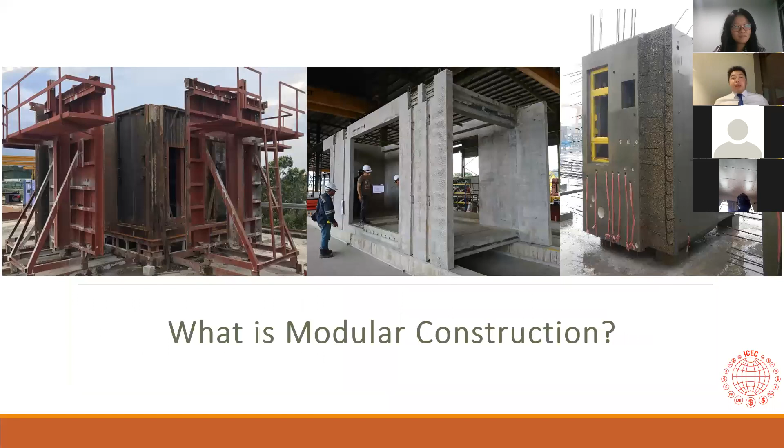Okay, so actually just for a few seconds to remind you all about our outlook, which this is covered. Okay, so what is modular construction? Modular construction, we have two terms here. One is MIC and one is PPVC. MIC stands for Modular Integrated Construction, while PPVC stands for Prefabricated, Prefinished Volumetric Construction. Both MIC and PPVC are the same in context, which is one of the innovative construction methods now, adopting the concept of factory assembly followed by on-site installation.

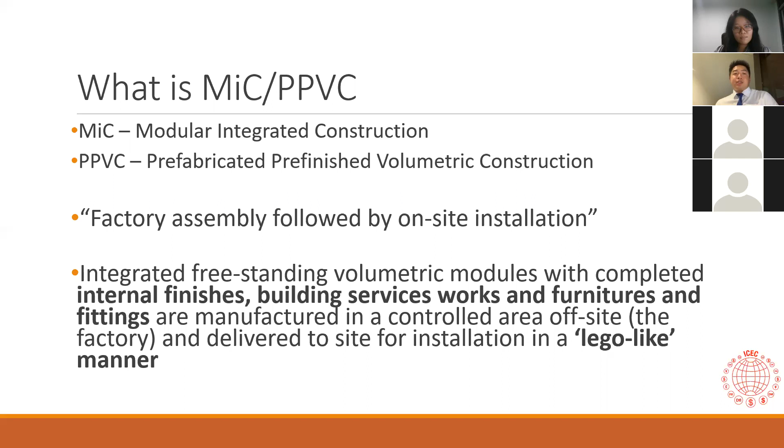Integrated freestanding volumetric modules with completed internal finishes, building services works, and furniture and fittings are manufactured in a controlled area off site, which is the factory, and delivered to site for installation in a Lego-like manner. MIC also claims to enhance product quality, at the same time improving construction productivity and safety. And MIC has been implemented across the world; many countries have already implemented MIC or PPVC for construction of housing, hostels, and other facilities, which seems to be successful in terms of productivity and cost.

On the other hand, prefabricated components only comprise small parts of a building. Structural parts other than prefabricated components need to be built using conventional in-situ construction methods. A substantial amount of formwork, steel fixing, concrete works, etc. are involved. Interior decoration and laying of pipes, etc. could only be carried out thereafter. Common prefabricated components include prefabricated facade, prefabricated slab, prefabricated wall, prefabricated staircase, semi-prefabricated slabs, and bathrooms.

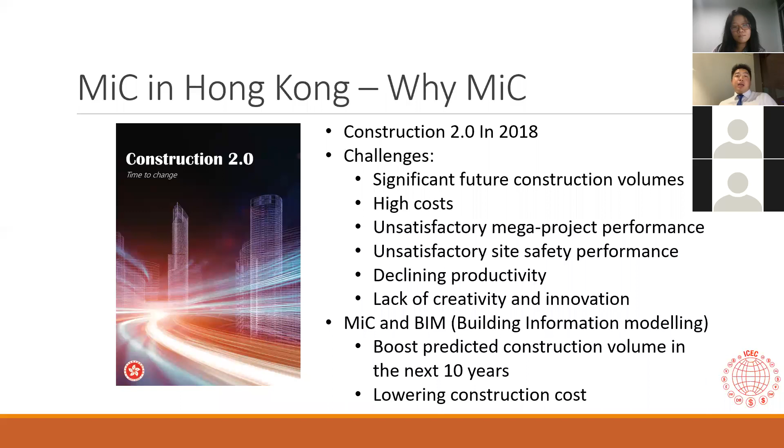So here's the history of MIC or prefabricated components in Hong Kong. Back in the 1960s, the Hong Kong Housing Authority implemented precast concrete components, including precast facades, precast staircases, and semi-precast slabs. In the 1990s, the average precast concrete volume was about 18% in the construction industry.

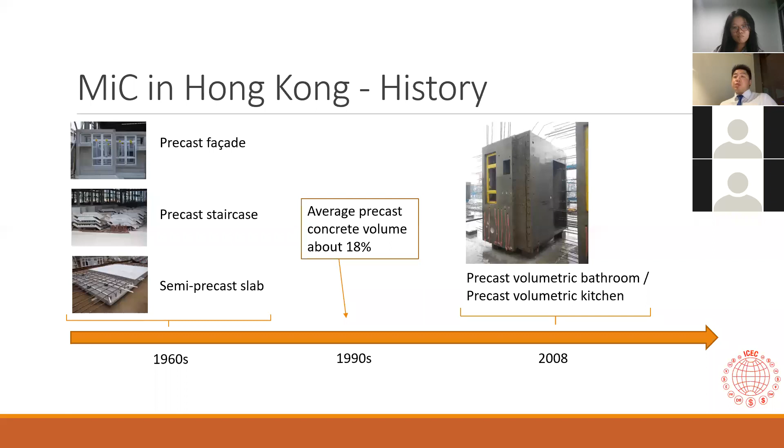Later on in 2008, the Housing Authority also implemented the precast volumetric bathroom and precast volumetric kitchen in public housing projects. These, which we call VPB and VPK, are similar in concept to MIC, in which the whole bathroom was prefabricated prior to installation.

In 2017, feasibility studies of MIC were started, and different government bodies have already issued guidelines and pre-acceptance mechanisms. As mentioned earlier, Construction 2.0 in 2018 proposed some pilot projects for implementing MIC. Some of them are listed here.

The first one is the student residence in Wong Chuk Hang for the University of Hong Kong, which we will have a case study on later. The second one is the Disciplined Services Quarters for the Fire Services Department. And the next one is InnoCell for the Hong Kong Science Park.

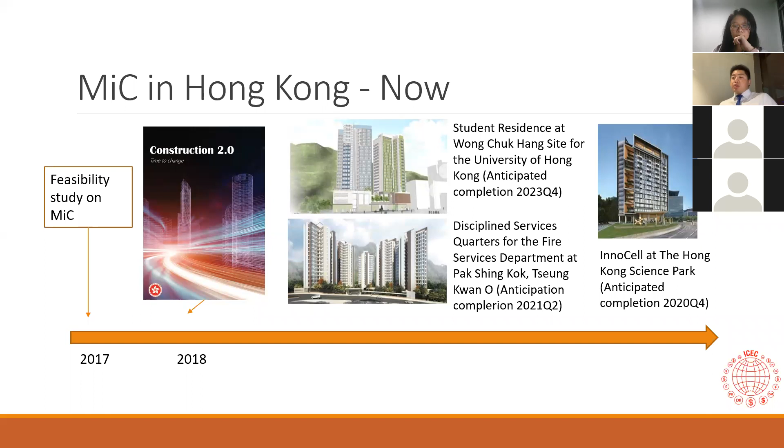So we'll talk about MIC in Hong Kong and the acceptance guidelines here. Actually, we have a Construction Industry Council in Hong Kong helping the practitioners keep up with the latest environment of the government. The Construction Industry Council issued guidelines on the statutory requirements for modular integrated construction in September 2019, which cover the requirements and guidelines from the government departments stated here, including the Buildings Department, Fire Services Department, etc. The guideline also includes construction industry issues to help the practitioners with government approval.

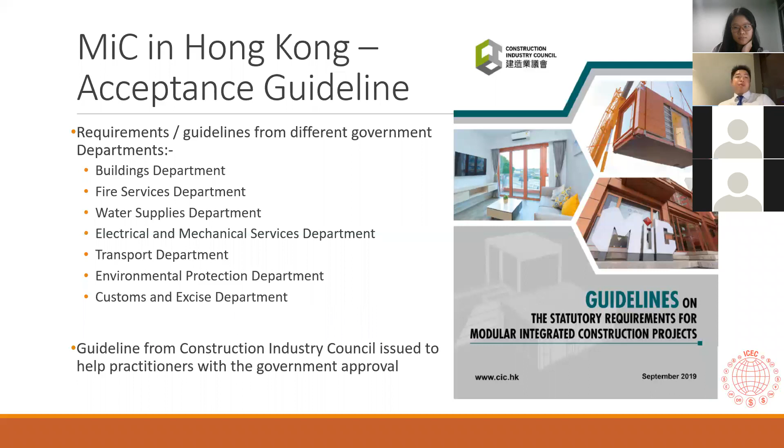Okay, so now we will share two case studies in Hong Kong. The first one is the student residence for the University of Hong Kong. As mentioned before, this is a student residence and it is anticipated to complete in Q4 of 2023. This is a 17-story twin tower with podium. The podium was built with conventional construction. A total of about 1,200 hostel places will be provided in about 850 modules. The modules will be constructed as 6-sided steel modules, and each module will weigh about 6.5 to 14 tons.

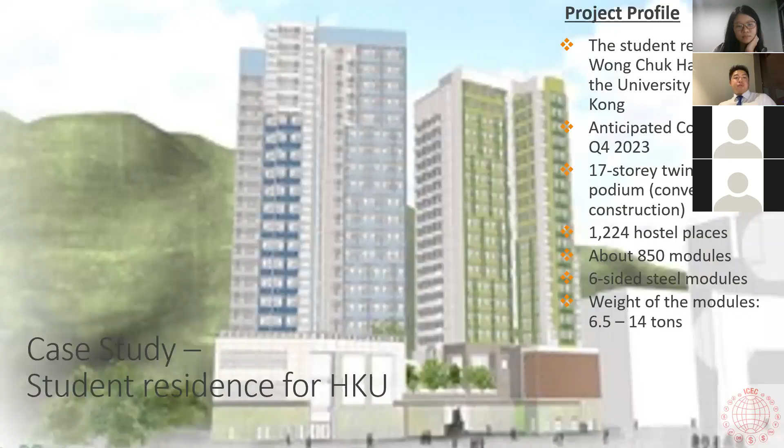So about the configuration of this HKU student residence, from the very beginning the approved plan is as on the left-hand side. It would be constructed in the conventional method. After Construction 2.0 in 2018, the University of Hong Kong actually modularized those rooms into the standard type and revised the toilet layout to suit the MIC unit. The revised plan for the MIC module is like the right-hand side. You can see those components are fit for MIC construction.

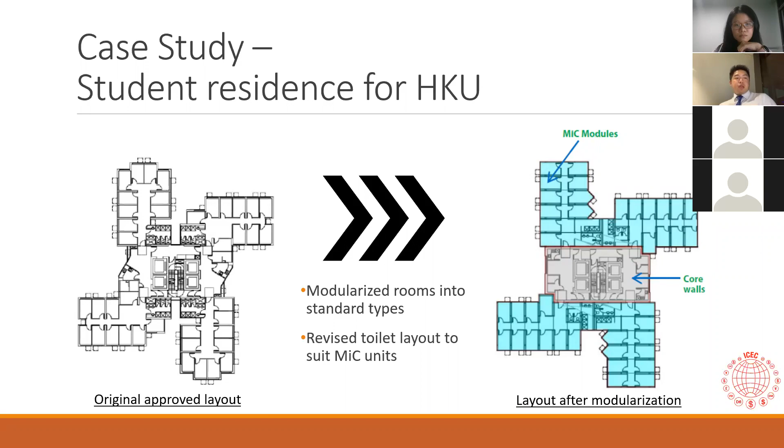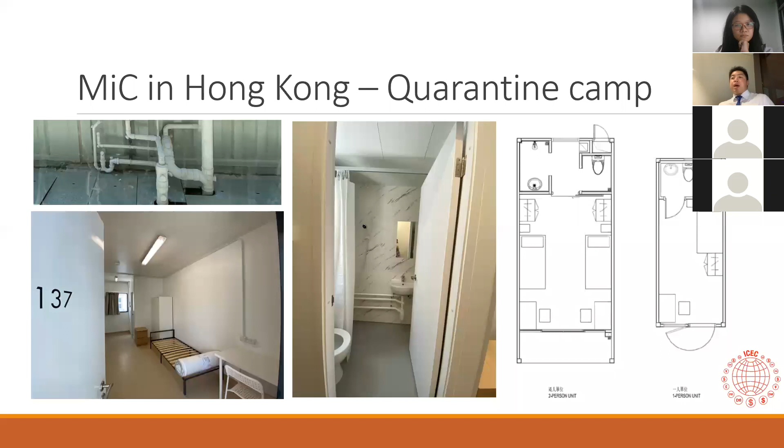The second case study is about the quarantine camp. The quarantine camp is one of the quarantine camps adopting MIC in Hong Kong that was built by renovating an existing holiday village. The camp consists of two sites. Site A was originally a basketball court, which consists of 118 modules, and it only used 25 calendar days for completion. Site B was originally a football field, which consists of 34 modules. Here are some pictures of the quarantine camp, the interior design, including the bed, the bathroom, and the floor plans.

So, MIC in Hong Kong: challenges. Since MIC is still at the pilot stage in Hong Kong and not much data could be obtained and analyzed, the success of MIC implementation here is not based on finalized figures of MIC projects. According to the research that I'm currently conducting, the construction cost of MIC can be reduced by 10% compared to the traditional in situ method. It is expected that the magnitude will increase after a learning process in the Hong Kong construction industry.

However, since most construction projects in Hong Kong are still adopting traditional contract conditions, a fast-track MIC project may lead to poor cash flow for the contractor. A large amount of money is required to be invested by the contractor before the contract starts. And currently, the payment system is based on the actual work completed on site. As a result, the majority of the payment will be paid near the completion of the project, creating a hard time in cash flow for some contractors during construction.

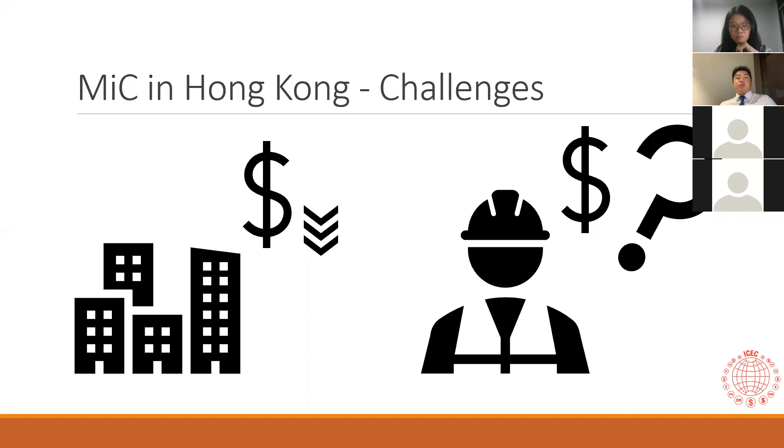So what is the QS or cost engineer's role in Hong Kong for MIC? QS duties, such as quantity takeoff, are actually similar to the conventional method, except the components shall be measured by module, multiplying by the number of modules, to avoid missing any double slab or double wall. The real impact on the QS or CE is whether an appropriate contract condition shall be constructed for MIC contracts to share the risk between the employer and the contractor. The current conditions may shift the risk and burden more to the contractor. Whether new or special conditions are implemented in future MIC projects is crucial.

And then we'll talk about MIC and PPVC happening in Singapore.

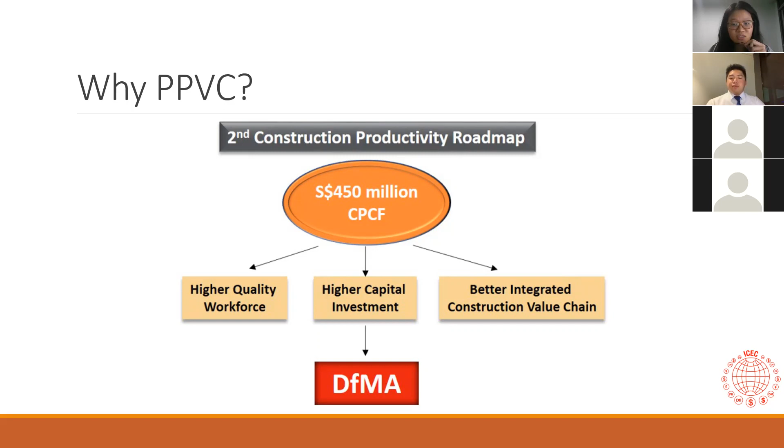As mentioned, modular construction in Singapore is named PPVC, prefabricated prefinished volumetric construction. Similar to Hong Kong, why does Singapore want modular construction? It's an initiative by the Singapore government, which would like to raise the construction productivity level. Back in 2015, the government introduced the second Construction Productivity Roadmap, setting aside a fund of 450 million to raise construction productivity through DFMA.

What is DFMA? There's a lot of short forms used in the Singapore construction industry, so please bear with me for some term explanations along the way. DFMA stands for Design for Manufacturing and Assembly. There are a lot of products due to the DFMA efforts, and PPVC is one of them. Others include, as you can see from the slide, MET, mass engineered timber, and the prefab MEP system, the mechanical, electrical and plumbing system.

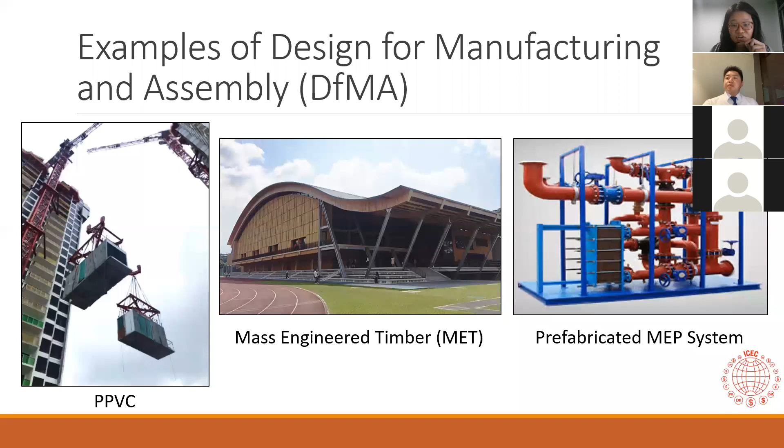Before the current COVID-19 pandemic, the Singapore government had targeted to create 39 more PPVC projects this year and next year. Currently I'm not sure how this target has been affected, but as the construction industry in Singapore is still quite uncertain due to the pandemic, the target number will surely receive some changes.

Currently, besides the funding I shared, another way the government helps generate PPVC demand is by making the adoption of PPVC a mandated requirement for selected non-landed residential and hotel projects under the Government Land Sales exercise. This means if a developer wants to buy land to build condominiums or hotels from the government, they buy the land with the condition that they use the PPVC method to build it. Similar to Hong Kong, we currently have 3 types of PPVC systems in Singapore.

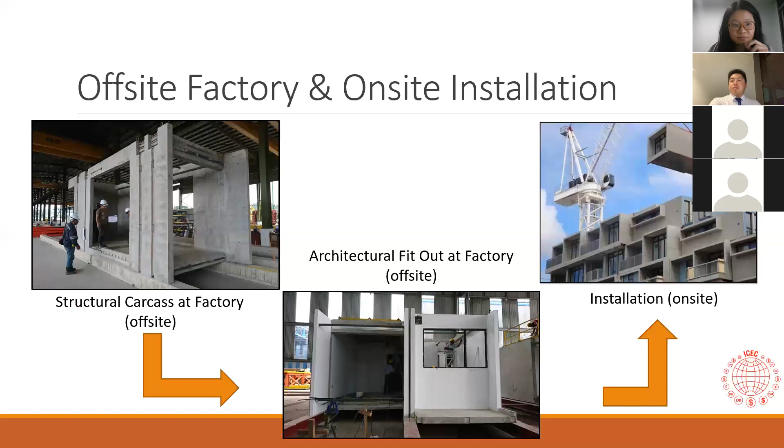The PPVC construction process in Singapore is split into 3 phases, as you can see from the photo: the structural carcass factory overseas, the architectural fit-out factory in Singapore, and the on-site installation. This is the graphical explanation of the PPVC construction process in Singapore.

You may wonder why the offsite factory for structure and fit-out needs to be split into 2 types, and why these 2 factories can't be combined in the same factory as in Hong Kong and other countries. This is a unique part of PBVC development in Singapore. Due to the land scarcity of Singapore, it's very difficult to find big land to build a huge offsite PPVC carcass yard in Singapore. So almost all PPVC structural carcass factories are built in Johor, Malaysia, as they have more big and vacant land.

Due to the high quality control and checks required by Singapore's architectural fit-out authorities, it requires highly skilled workers to carry out the fit-out works. However, the pay scale between Malaysia and Singapore is in a 1:3 ratio. So the same highly skilled worker, if they work in Malaysia, might receive 1,000 ringgit as salary, but in Singapore they would receive 1,000 Singapore dollars, which converts to about 3,000 ringgit.

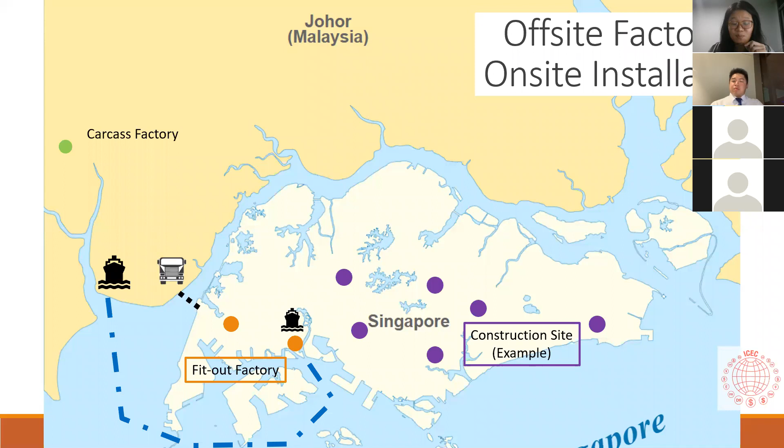So next, I will actually share about the module design constraints. So first is the transportation.

The logistics for the module transportation from factory to site will actually determine the size and the volume of each module design. So the size of a single module will be limited by the dimensions allowed to be transported on public roads. And the height consideration also needs to be factored in if the transportation will pass through overhead bridges. This in fact will affect the number of modules needed to configure the unit layout design.

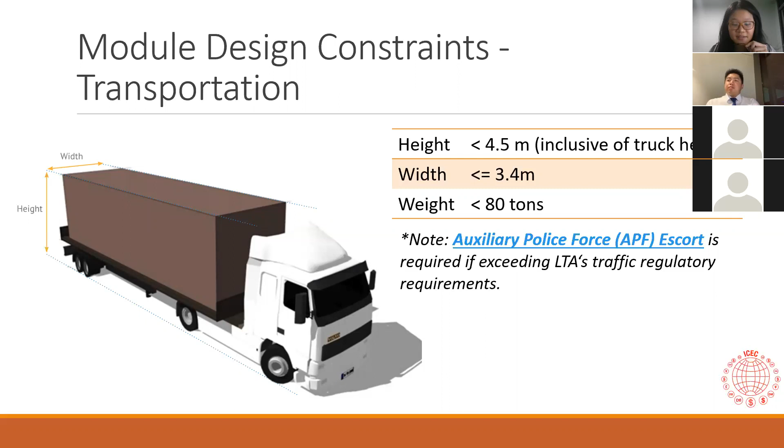So as you can see from the table here, the height, width, and weight restrictions on the dimensions are listed. If the module transportation size exceeds these controlling parameters, authority permits and police escorts are actually required. All of these additional requirements are additional costs to the overall contract sum, which I will touch on in the cost part later in my presentation.

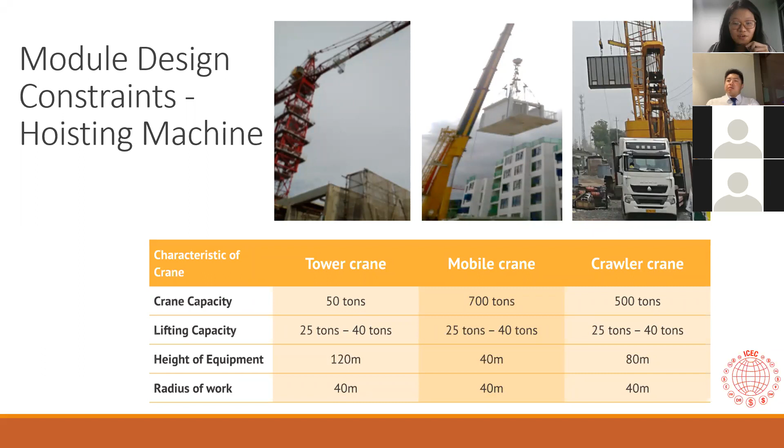So with the design constraints in mind that we just learned, the architect and engineer need to think thoroughly on how to configure the PPVC module of a unit so that it can still meet the authority requirements. The PPVC module needs to be buildable, meaning it's able to be delivered from point to point and also able to be lifted out when it reaches the site to fit into the building, without compromising quality, and without incurring unnecessary cost premiums. So here are two examples of PPVC module configurations.

The example on the left is a perfect split of a 2-bedroom unit into 4 modules. As you can see, module A is cut into the living room and dining room. Module B is a bedroom and bathroom. Module C is the master bed and bath, and module D is the kitchen.

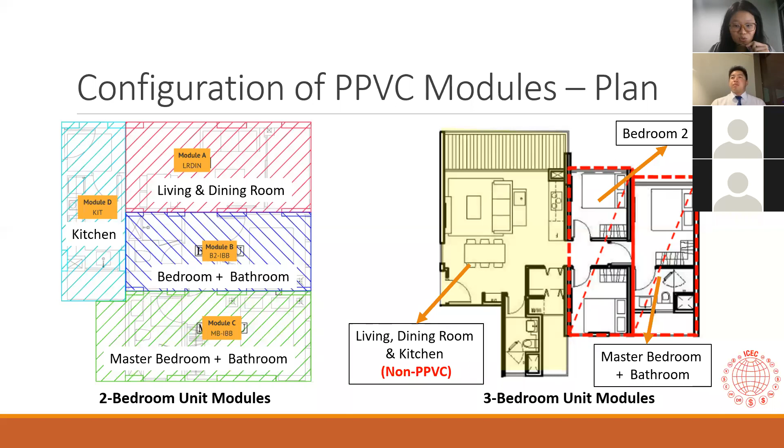But the second example on the right, you can see the yellow part is actually too big, so it's unable to fulfill the transportation and hoisting constraints that we learned in the previous slide. So for this case, the living, dining room, and kitchen will not be able to be translated into a PPVC module, and this portion will be done using the conventional construction method instead.

Further to the yellow area that we learned is too big to translate into a PPVC module, some of the common areas of a residential or hotel block are also unable to be translated into PPVC modules. For example, on this block plan, the common corridor, the staircase core, and the lift core will not be configured into PPVC modules, and so they also will be built using the conventional construction method on site.

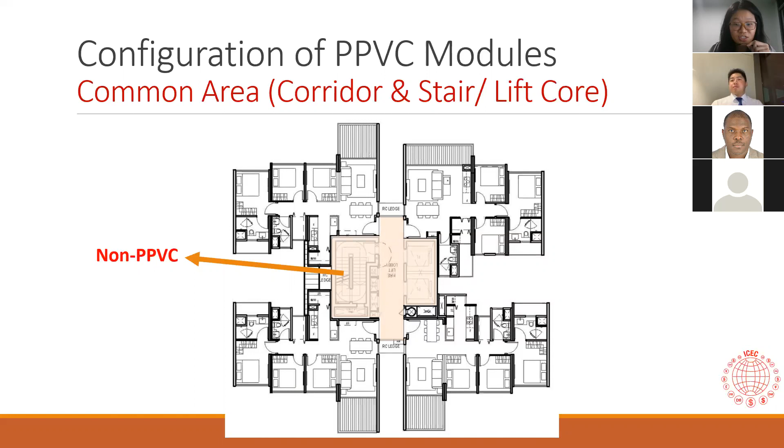So after understanding the design constraints on the PPVC configuration, I believe we can now appreciate more how this first authority guideline came about. BCA actually stands for Building and Construction Authority of Singapore. It's the authority that governs the rules and regulations of Singapore's construction industry.

So BCA has mandated the adoption of PPVC as a land sales requirement for selected residential and hotel developments. They also understand that certain parts of construction are unable to be PPVC modules, and therefore the minimum requirement of PPVC adoption for a project is set at 65%.

There is also a minimum archi fit-out to be completed offsite, as set out in this table below. This means some of the archi fit-out is allowed to be done on site. For example, floor finishes at 80%. The remaining 20% can be the floor finishes linking the two PPVC modules, which is unable to be done in the factory. Some other examples, like M&E equipment, lighting, and loose furniture items, which tend to be damaged during delivery, are also allowed to be installed on site.

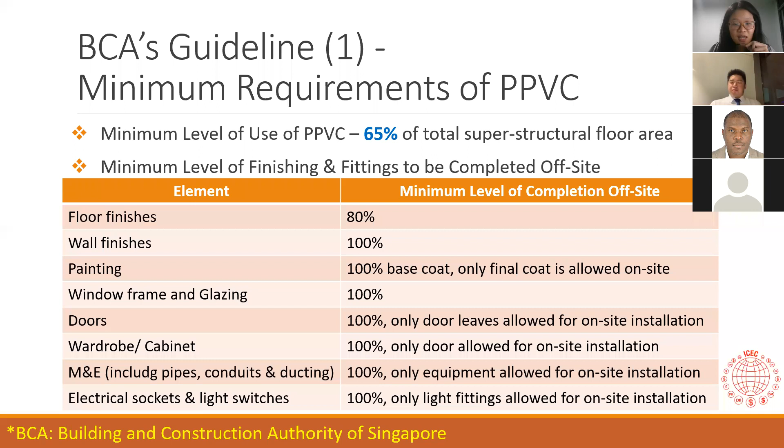Besides that, there is also a PPVC acceptance framework similar to the Hong Kong or other authority acceptance frameworks, which the design team and construction team need to apply for and obtain approval for before starting PPVC construction. This framework consists of two parts: first, the PPVC design and construction method must be accepted by the Building Innovation Panel (BIP); second, the PPVC contractor must be accredited under the PPVC Manufacturer Accreditation Scheme.

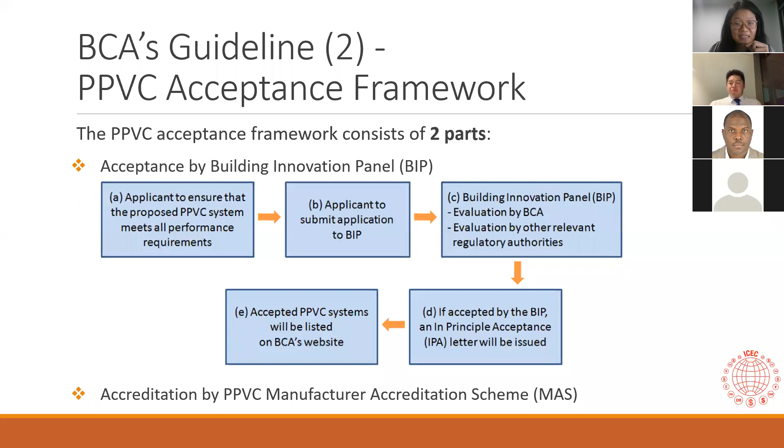To date, there are 16 architectural firms, 17 C&S firms, and 25 contractors who have PPVC projects in their portfolio. There are also 28 PPVC manufacturers accredited for the concrete PPVC system, while 15 are qualified for the steel PPVC system.

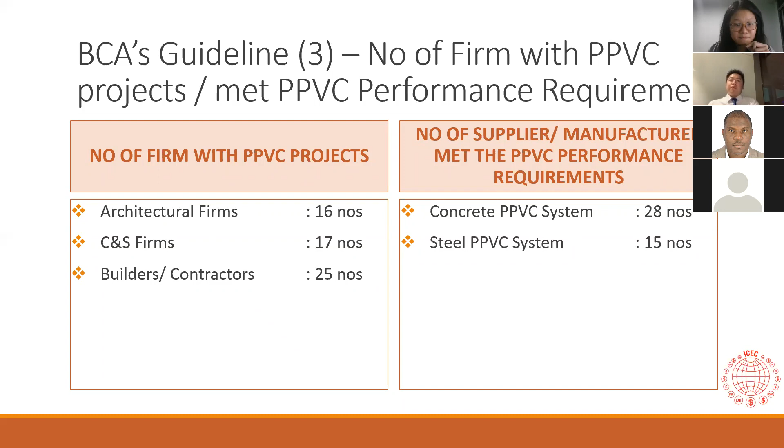Next, I will share three PPVC case studies in Singapore. The first is the Nanyang Technological University North Hill Hostel. Completed in 2015, the NTU North Hill Hostel is Singapore's first public PPVC building. It is a student hostel with 8 blocks, 13 stories, and close to 1,600 rooms, using about 1,200 steel PPVC modules. As this was the first PPVC pilot project in Singapore, the cost premium of PPVC adoption was quite high, close to 18% more compared to conventional construction methods.

The second case study is the Crowne Plaza Hotel Extension, located next to Changi Airport and completed in 2016. It is Singapore's first private PPVC building, a hotel with a single block, 10 stories, and 243 rooms. It is a hybrid PPVC module, using steel frame but concrete floor base, and it only took 26 days to finish installation of the 252 modules.

One interesting fact about this case study is that this building was featured as a key Singapore PPVC development, and a time-lapse video of the PPVC installation process can be found on YouTube. For those interested, you can search and view it yourself. Also, as the builder became more familiar with the PPVC construction process, the cost premium for this project dropped from the previous 18% to a range of 10 to 15%.

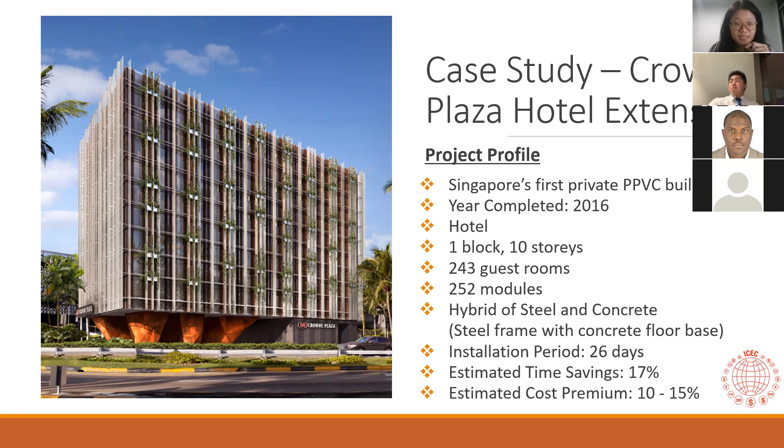The last case study is Clement Canopy. Just completed last year, Clement Canopy is so far the world's tallest concrete PPVC building, at about 40 stories high. However, in Singapore itself, another 56-story PPVC residential building is under construction, so this world's tallest position will likely be substituted by that building anytime soon.

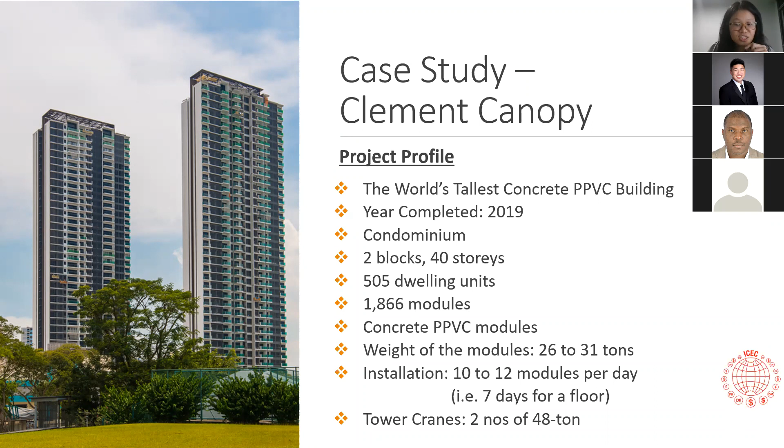This is a condominium project with 505 units and 1,866 PPVC modules, using the concrete PPVC system. So the three case studies I shared just now actually used three different types of PPVC systems.

Now let's come to the key part of my presentation today: what is our role as a quantity surveyor or cost engineer in PPVC development in Singapore? How has this game-changing technology affected QS or CE in Singapore so far? First, let's talk about cost implications. Based on the latest market study, with more PPVC players in the market, the estimated cost premium of PPVC has dropped from the initial 18% to currently 8% as of last year. There are actually 6 cost drivers.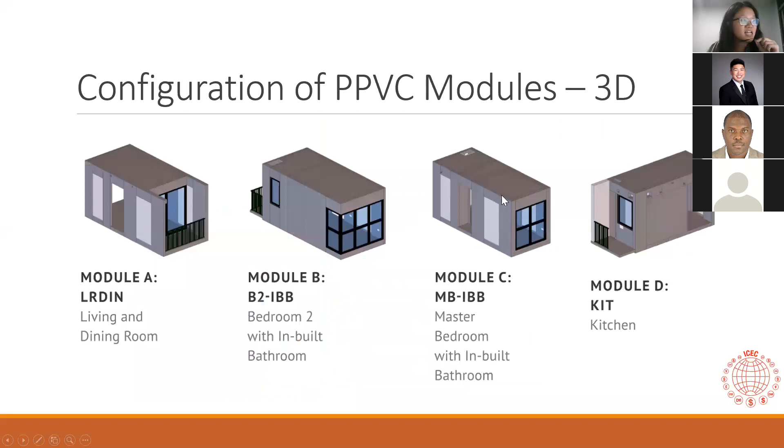Second is transportation. As mentioned just now, extra cost will be incurred if authority permits, from LTA (Land Transport Authority), and police escort are required for transporting the PPVC module from point to point, be it from an offsite factory in Malaysia to Singapore, or from a Singapore factory to the construction site. The cost for the permit and police escort is counted on a per-trip basis.

The third cost driver is the hoisting crane, as we shared just now. The fourth is building the unusual, large offsite yard. The fifth is the application of the additional Temporary Occupation License (TOL) for the land, for temporary storage of the PPVC modules before on-site installation. And lastly, we also incur additional supervision costs for the off-site or factory.

So next, I will share about the contractual implication.

So the procurement methods. Due to the module complexity, and most PPVC will have own proprietary system, it's actually highly encouraged to engage the PPVC contractor early during the design stage to facilitate the integration of the design and construction process. It also helps to provide better and more effective technical solutions. Besides the traditional procurement method, the design and build procurement method is actually more encouraged for the PPVC project.

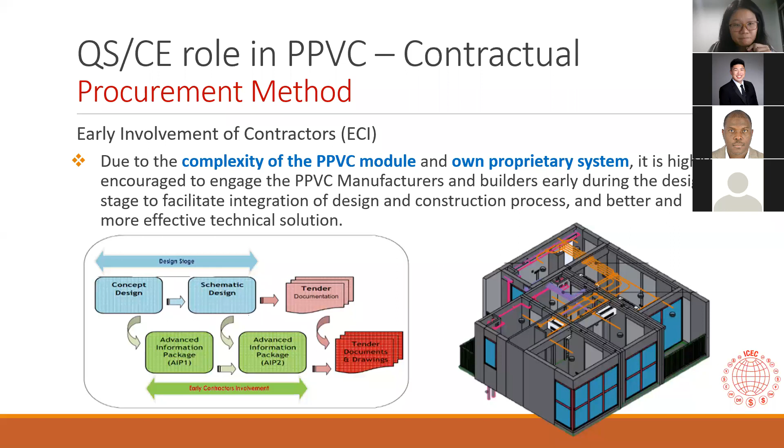So the payment arrangement. In Singapore, payment for material offsite is not typically practiced, and contractors are usually paid as work is completed on site progressively. But as you can see now, almost all PPVC modules are completed offsite and then transported to site for installation. If the owner still follows the traditional way of only paying for the PPVC when it's fully completed, delivered, and installed on site, it will definitely affect the contractor's cash flow.

Therefore, the two-payment approach in addressing the PPVC payment issue has been established in Singapore. For the public sector, with the provision of the advance payment bond, an advance payment of 20% of the total PPVC cost, subject to a maximum of 10% of the total construction sum, can be paid to the contractor upfront. For the private sector, besides a similar advance payment approach with the provision of the advance payment bond, another milestone payment on an agreed percentage is also being developed to facilitate the PPVC payment issue.

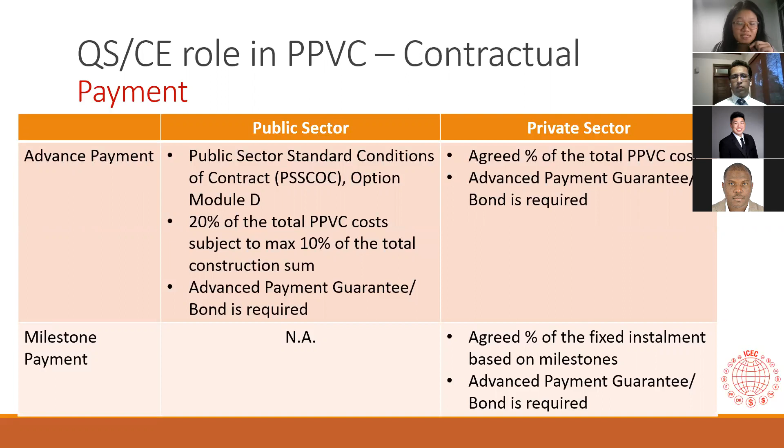So this is the example of the advance payment clause actually being spelled out in the public sector project, the Option Module D inside the public sector conditions of contract, the PSSCOC.

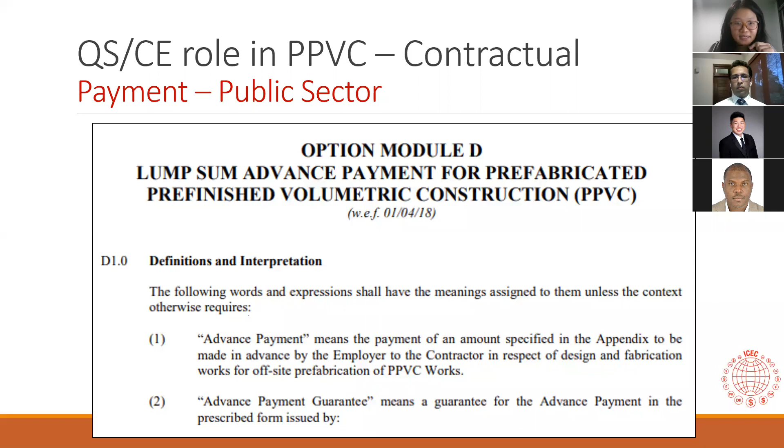Then this is the example of the milestone payment. The percentage you're seeing in the slide is actually the most common schedule for milestone payment currently in Singapore private residential projects. So 30% for the completed structural carcass can be paid upon the carcass being delivered to the Archi fit-out yard in Singapore, another 30% for the completed Archi fit-out PPVC module upon delivery to site, and the last 40% for the PPVC module upon successful installation to the building.

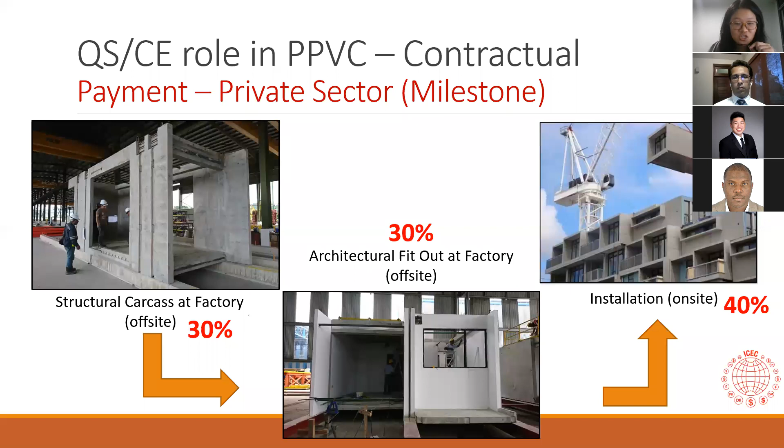So next is the insurance. Due to some offsite work being carried out in overseas factories, on top of the existing construction insurance coverage, there are two particular areas of insurance that need to be addressed. The first one is the additional property all risk policy, which is required to cover the offsite factory in another country - in this example, Malaysia.

Then second is to ensure a proper marine cargo insurance is in place, required to cover the shipment or transit of the PPVC module from another country to Singapore. Both insurance policies need to be insured in the joint name of both the contractor and the employer. For PPVC projects, it's also more preferred for the employer to procure the insurance themselves, or for the contractor to procure it from the employer's insurance broker, instead of the contractor buying the insurance by themselves. The reason is that if the contractor procures the whole construction work insurance by themselves, they may miss out these two additional overseas coverages, which are important for PPVC projects.

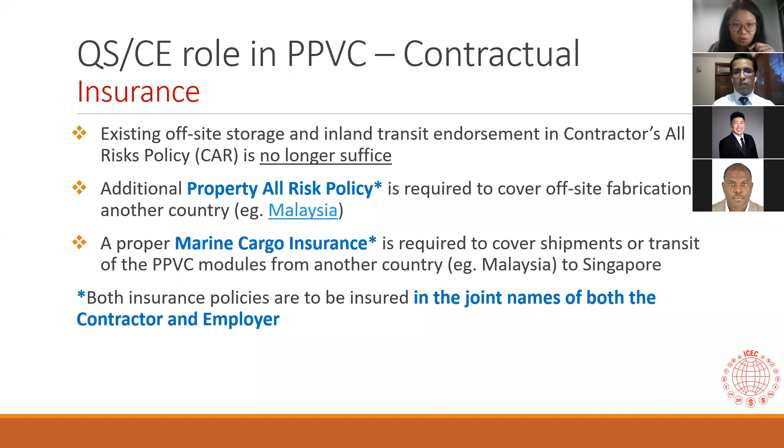So lastly is the nominated subcontractor, the NSC arrangements. As some of the NSC product delivery or construction work are also affected by PPVC arrangements, back-to-back provisions relating to payment, the advance payment bond, and insurance shall also be provided in the NSC contracts. So as a QS, we shall also ensure that the NSC contract sum includes all the delivery, be it to the offsite factory in another country or in Singapore.

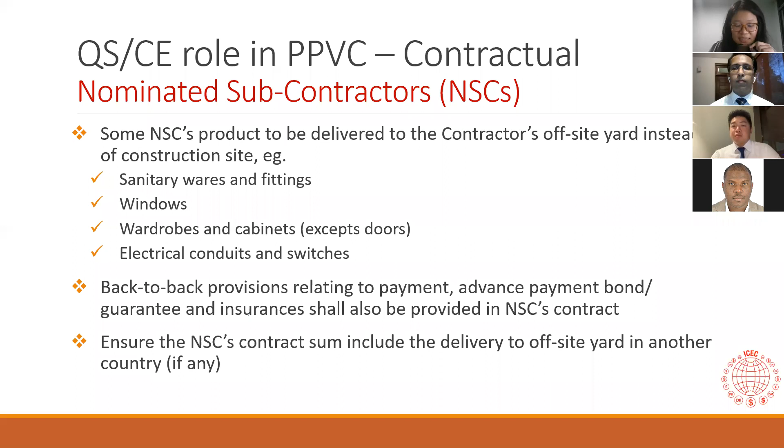In terms of year of implementation, Singapore is slightly earlier, in 2015, while Hong Kong is in 2018. The main driver for both is actually a government initiative. So far, the number of completed and ongoing projects for Hong Kong is 15 plus, and in Singapore it's more than 35. Both Hong Kong and Singapore also have their own authority acceptance frameworks.

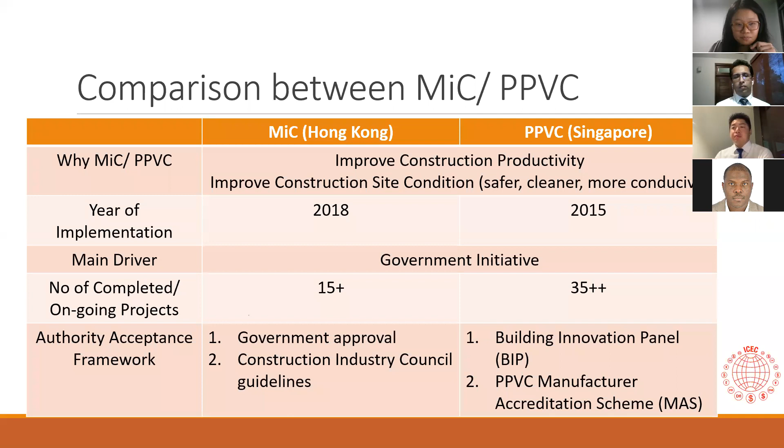The type of PPVC and MIC is the same, the three types. The module configuration, in fact, is something that quite amused me when I discussed with Sunny. In Singapore, as I showed just now, one unit can split into 4 to 5 modules, but in Hong Kong, one module can fit to 2 units. So it's something quite different.

For contractor procurement, in Singapore it's more encouraged to use design and build, but Hong Kong is still using the conventional way. For both countries, we also agreed that we'll engage the PPVC or MIC consultant early. But in terms of early contractor involvement (ECI), so far there is not a common practice in Hong Kong, but it's quite common in Singapore.

With regard to the estimated cost premium, for both countries it's quite similar, like 9% to 10%. For estimated time saving, since there is no completed project in Hong Kong so far, there is no data we can draw from. But for Singapore, according to the study, the time saving is around 17 to 20%, which is around 2 to 6 months.

In terms of contractual arrangement, for Hong Kong, as you can see, payment and insurance coverage is still similar to conventional construction. But in Singapore, they are looking at advance payment and milestone payment approaches for material offsite, and they have also extended insurance coverage to overseas yards and shipment. Hong Kong's payment arrangement is still similar to convention, though they also implement advance payment and require an advance payment bond when paying for the MIC.

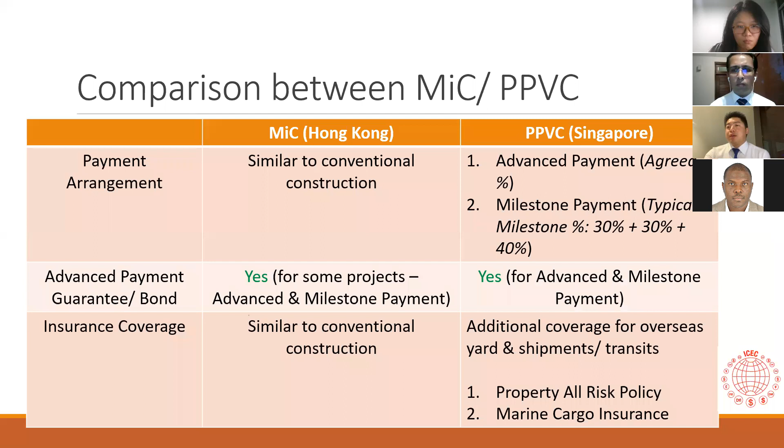Jacqueline, can we move back to the comparison table about the cost reduction? Yeah, one more. In Hong Kong, there are not many completed projects that allow us to analyze the cost. But in general, during the tender stage, it was generally reduced by about 10% of the construction cost. But what components compose this 10% needs further analysis. Maybe Jacqueline, can you share about Singapore? Okay, let me just flash to the cost driver slide that I shared just now.

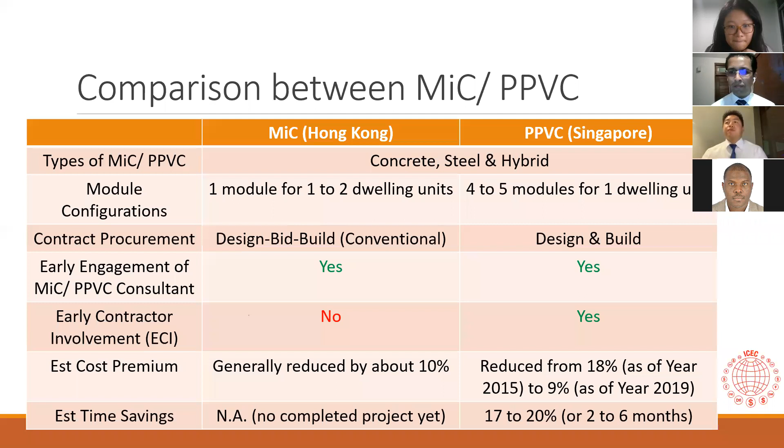Okay, so I believe the cost drivers that contribute to the cost premium in Singapore are quite similar to Hong Kong as well, because we are actually quite similar. In the beginning there was 18% when it was just implemented in 2015, and in fact when I was having a PPVC project in my previous company, when we did the cost estimate for the PPVC cost as compared to the conventional method, we also estimated the cost premium to be 10 to 15% back then.

But now, according to the latest study conducted by BCA, it has further dropped to 8% as of last year. As you can see from the six components over here, one of the things that may be further reduced in future is the precast mold. As I understand, one mold itself can go up to five digits in Singapore dollars, just the mold itself. So let's say the building's total PPVC modules are 1,000, and they need 200 or 300 molds. You can see how high the cost can be.

It actually depends, because another designer with a similar 1,000 modules can design the precast mold so the reuse improves and the number can drop to maybe a hundred or 150. So this can affect the cost premium from project to project. In terms of the precast mold, reducing the cost premium comes down to the capability of the designer and the cooperation between the PPVC contractor and the designer, how they can design a more effective PPVC module.

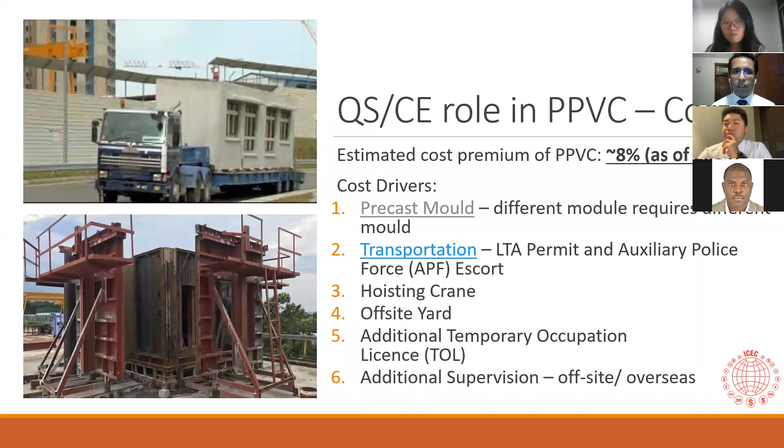Thank you very much, Wong and Jacqueline. We have two more questions of a similar nature, so I will rephrase them. Ladies and gentlemen, the question is regarding structural stability compared between conventional and PPVC or MIC modules. How is structural stability ensured in PPVC modules, whereas in conventional in-situ construction the structural stability is well known and tested? How do you ensure the same structural stability in PPVC or MIC modules or buildings? Can we elaborate on that?

Thank you for your question first. But do we have such information? I doubt that, about the structural stability. I actually don't have any information with me about the structural or stability part of the ongoing MIC project. I think the question could be more relevant to a structural engineer and construction professional. So I'm sorry, ladies and gentlemen, there were two questions on the same topic. As cost engineers and QSs, we may not be the ideal persons to advise on structural stability.

Yeah, because we are cost engineers and QSs, maybe just in general: I visited a PPVC site before together with the structural engineer and the architect. During the presentation and the visit, the engineer asked a lot of questions to the PPVC contractor about how they design. That's why I flashed this slide. You can see on the left-hand side the PPVC module. Most likely this will be built next to another one, so how the adjacent walls connect to each other, because the conventional way is we just build everything.

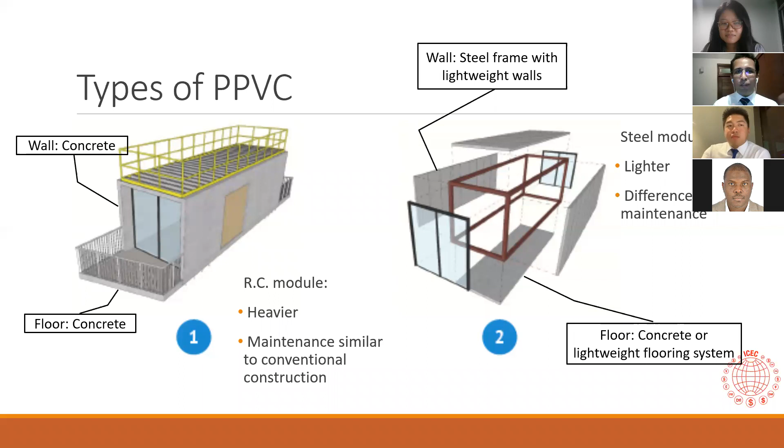Okay, great. So last question, I think this is a good question to wrap up the session as well. So just in summary, if Sunny and Jacqueline can explain, the question is, what are the advantages of PPVC or MIC over conventional methods? So if you can elaborate why we should use PPVC as opposed to the conventional method, and how do you think this will go into the future? That will, I think, wrap up the session quite well.

Sunny, you are on mute.

Anything to add, Jacqueline, as a final note? Yeah, just to add on, I think the advantages are similar. As you can see, how Hong Kong and Singapore embarked on this modular construction journey is actually backed up by the government. So I feel that for PPVC or MIC to be successful, government support is very, very important. So on top of all these advantages, I think the key point is the government initiative. Yeah, thanks.